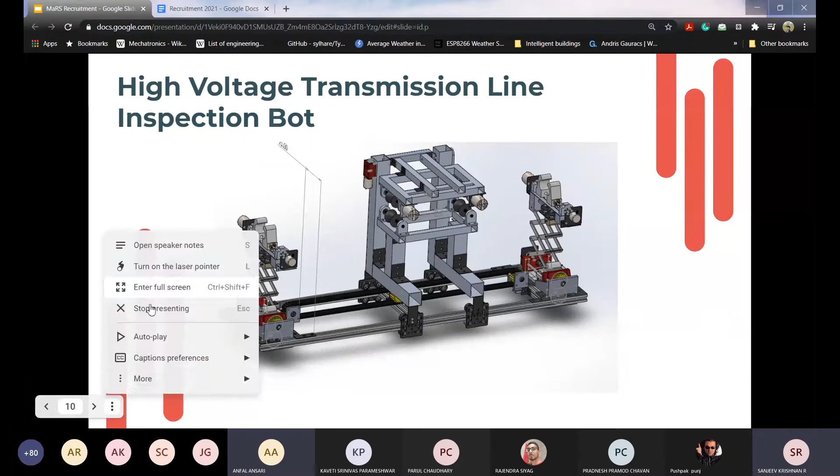High voltage transmission lines need to be inspected from time to time for maintenance purposes. It is necessary as many households and industries are dependent on the power supplied by these lines. As per the current scenario, this maintenance is conducted manually by workers, either by hanging from a helicopter or climbing tall transmission towers and inspecting each and every line. Due to the enormous length of transmission lines, this process is very time consuming and expensive, and there is also a risk to worker life.

Our solution to this problem includes a semi-autonomous bot which enables a worker to remotely detect flaws in transmission lines without any need of physically inspecting them. Our bot can crawl on the wires, detect obstacles and cross them, as well as detect faults in the wires. Next, please.

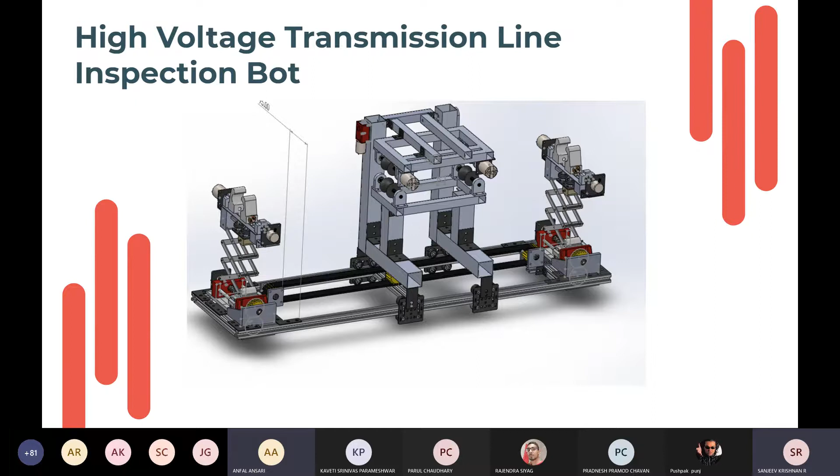Next project is our OT Light. This project basically involves automating surgical lights used in the operation theater. At present, these lights are adjusted manually during the operation. On average, the position of the lights needs to be changed every 7 minutes, thereby hindering the surgical process. There are three parameters that have to be changed: position of the light, its orientation, and its intensity. We are making a bot to automate this process.

By taking feedback from the environment through various sensors, it will change position, orientation, and intensity of light in a way that creates minimum disturbance to the surgeon. At present, we have found a solution using ray tracing and multi-objective optimization, and we are in the implementation phase of it.

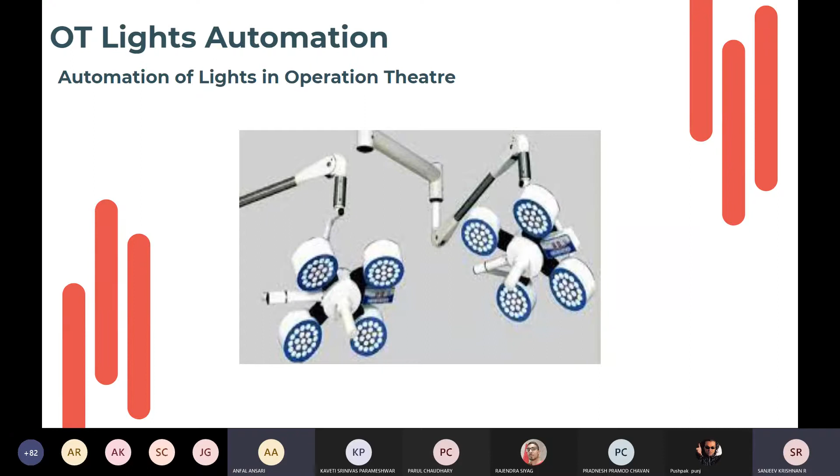One thing I wanted to add here is these two projects, OT Lights and HT Line Inspection Bot, we started after lockdown, during lockdown actually, and all the progress is done in online mode. So you can trust us that we'll definitely be able to teach you and make you do something sensible in this online mode.

Next is Chitrak. Over to you, Shubham. Chitrak was basically aimed to be a dynamically stable, power efficient quadruped bot, basically a 4-leg bot. Each leg has 2 degrees of freedom, and currently we are trying to design 3 degree of freedom legs for the bot. Let's watch that video; it will be clear.

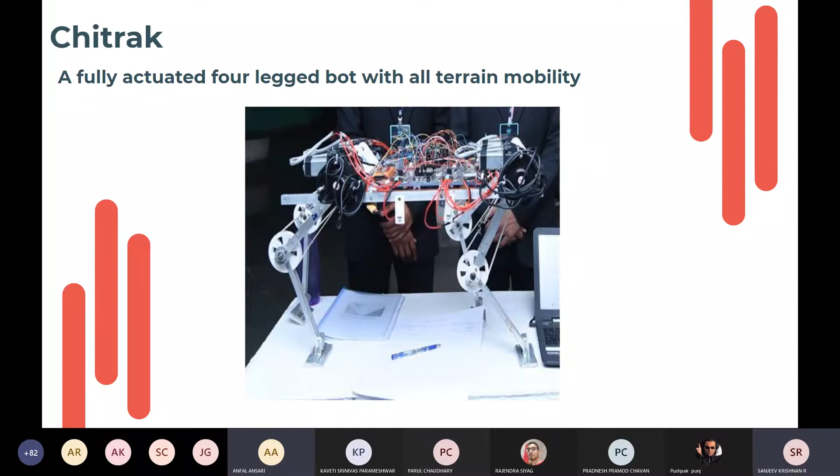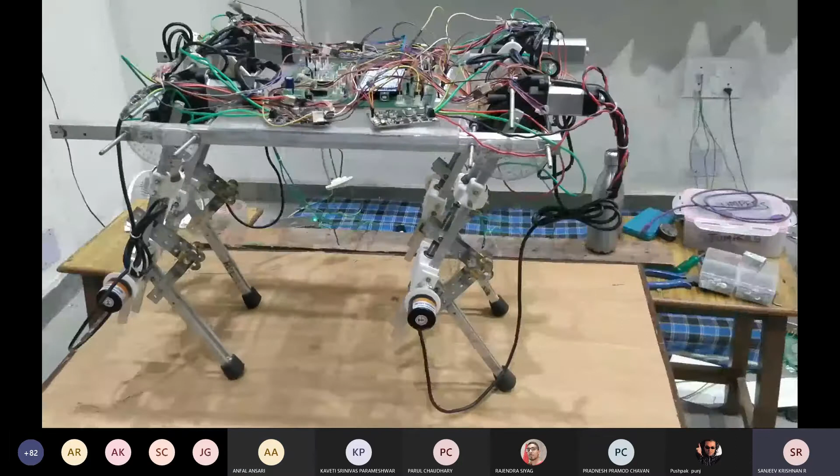Less than half the Earth's landmass is accessible to existing wheeled and tracked vehicles. Our mission is to develop a rough terrain robot that captures the mobility and speed of living creatures. Chitrak robot is aimed to be a dynamically stable quadruped robot with sophisticated computing and power system, advanced actuators and dynamic control. There are many problems with current quadrupeds; one major problem is the runtime of current robots is very less.

While standing, these robots consume energy which can be avoided to increase the runtime. Our aim is to make a quadruped more energy efficient, so we have designed a robot for the same. The 9.4 kg robot will be driven by 4 worm gear DC motors and 4 normal gear DC motors, but with a lead screw mechanism.

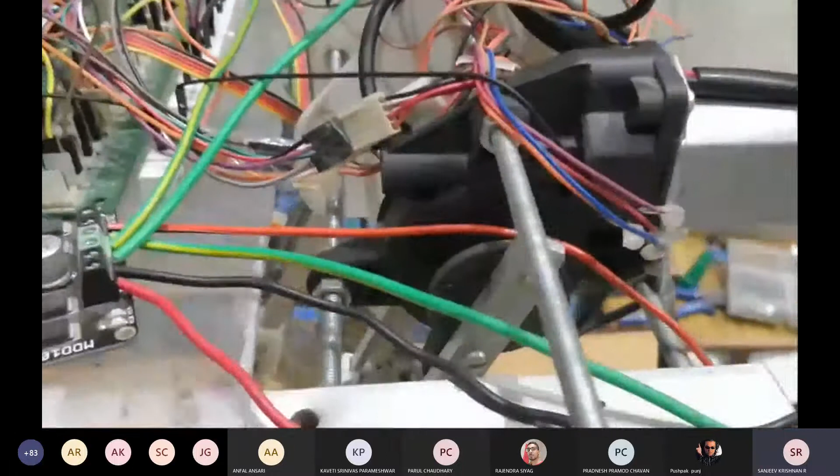Currently, each leg has 2 degrees of freedom, which is aimed to be switched to 3 degrees of freedom soon so that the robot has more flexibility and can easily change its direction. The worm geared motors are placed at the hip joint, driving two links on both sides which are connected to its shaft via coupling.

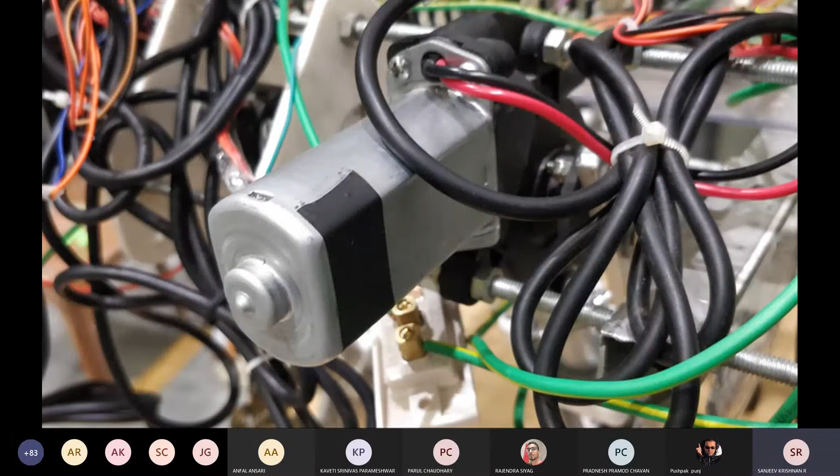The high torque worm geared motor has self-locking capacity which locks the motor in position while providing enough torque without consuming energy. The other DC motor is responsible for the knee joint motion via a lead screw mechanism, which also has self-locking capability, so while standing still the knee joint also gets locked and doesn't consume power. For a single leg, there are two active leg joints. The knee joint is rotated by the actuator mounted at the hip joint through the lead screw mechanism. Each actuator unit has a rotary encoder attached for angle measurement.

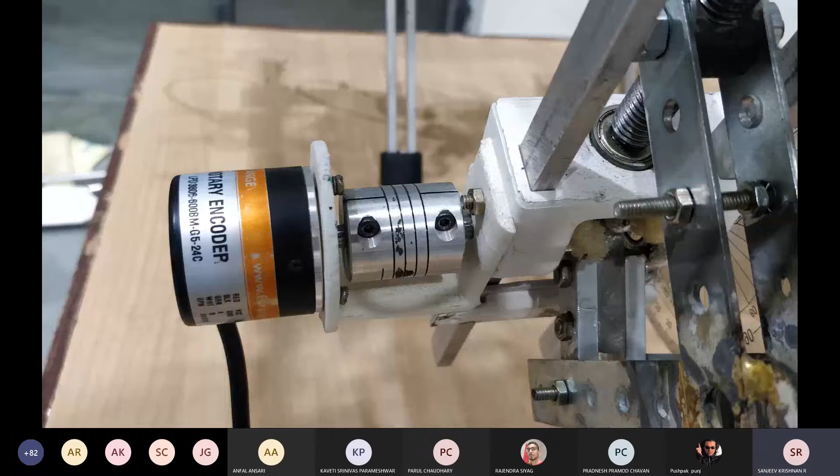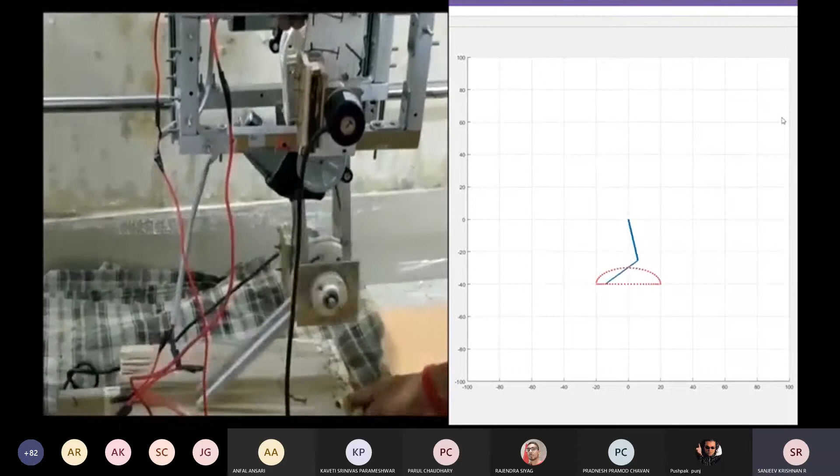In our first prototype of one leg, we simulated the leg motion on MATLAB, taking the trajectory of the end effector to be a semi-ellipse, which approximates the natural leg motion. We applied inverse kinematics on the end effector using an XY reference frame on the hip joint and varied the joint angle accordingly. For smooth motion, we used splines for trajectory planning, taking the acceleration to be zero.

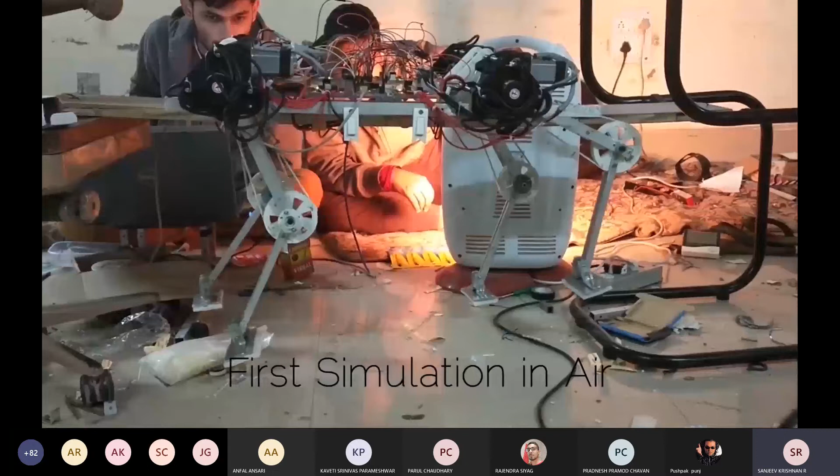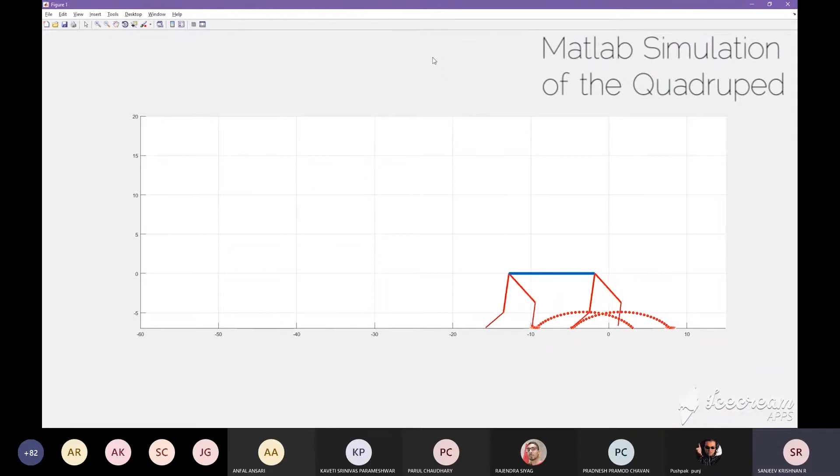We tested two gait cycles. First is the creep cycle, in which every leg moves one by one - when one leg completes its elliptical path, the remaining three complete their straight line. Second is the trot cycle, in which the bot moves forward using two diagonally opposite legs simultaneously. Here is a video of our current design using the trot cycle in air.

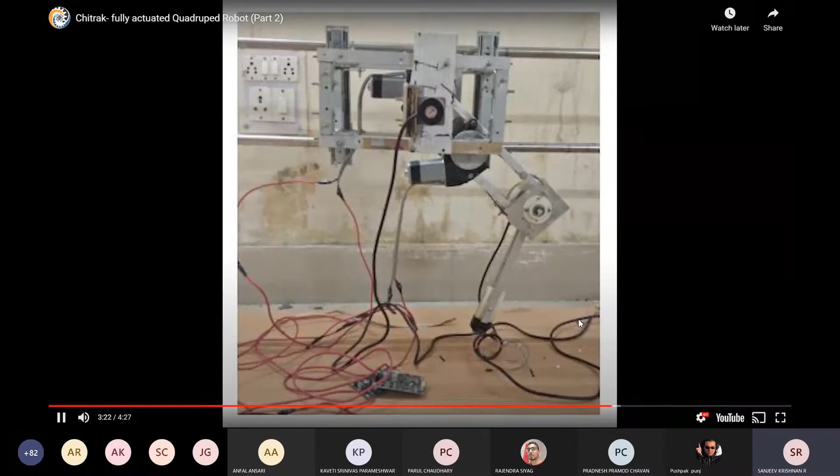But then we tested it on one leg, and we found that the knee joint motor's weight was providing extra torque on the hip motor, so we shifted to a second design, which transfers motion into rotation at the knee joint.

The field of quadruped robotics has huge scope, but sadly in India we are yet to explore this field. Some Western countries have already developed quadrupeds to help their army or for other work. We, Team Chitrak, are dedicated to our goal of building a cheap and energy efficient quadruped robot. We are giving our best to build Chitrak. Thank you.

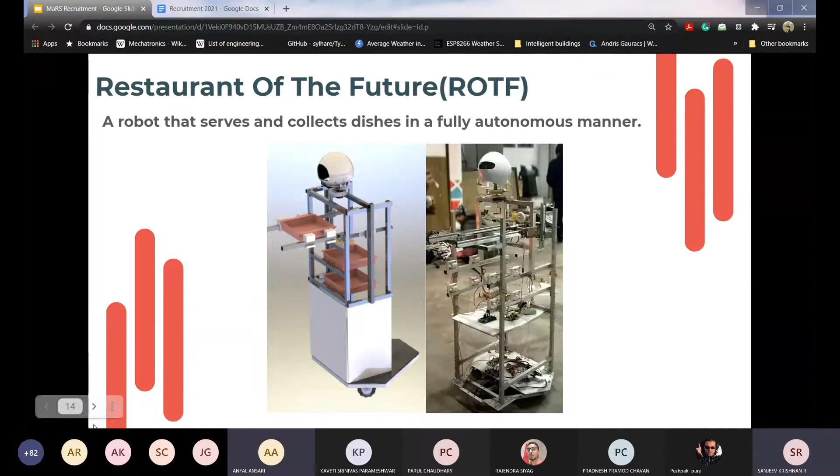Hope you enjoyed that video. Next is our next project, ROTF.

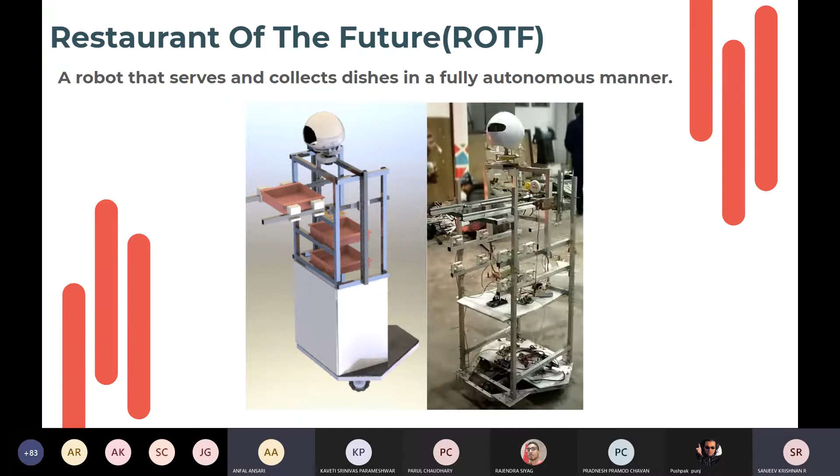ROTF is basically a robot that can replace waiters in a restaurant. It can travel within the restaurant by sensing obstacles and reach out to tables, talk with customers - for which we have made a chatbot. It can pass the order to the kitchen, pick up the order, and deliver it at the table. It is in no way different from human waiters. Let's watch the video of ROTF.

So hope you all enjoyed the videos and the details about the current core team research projects. Now let's get into what we did in Inter-IIT in the past years. Hello everyone, I am Shubham, currently joint secretary at MaRS. Let's discuss some of our achievements.

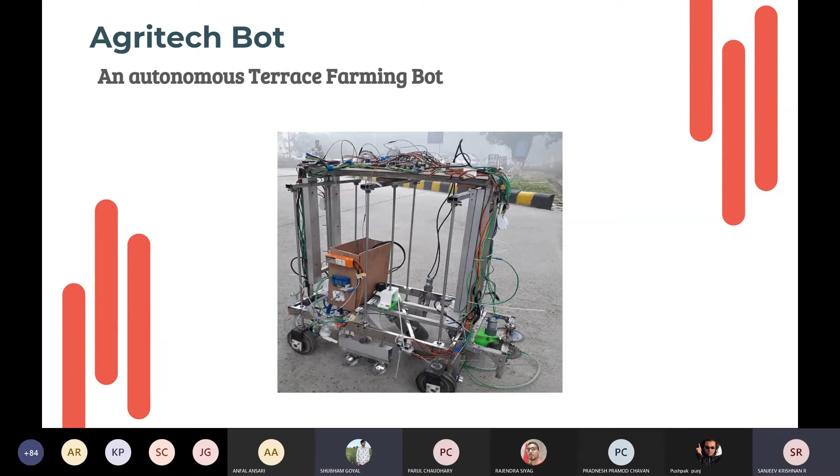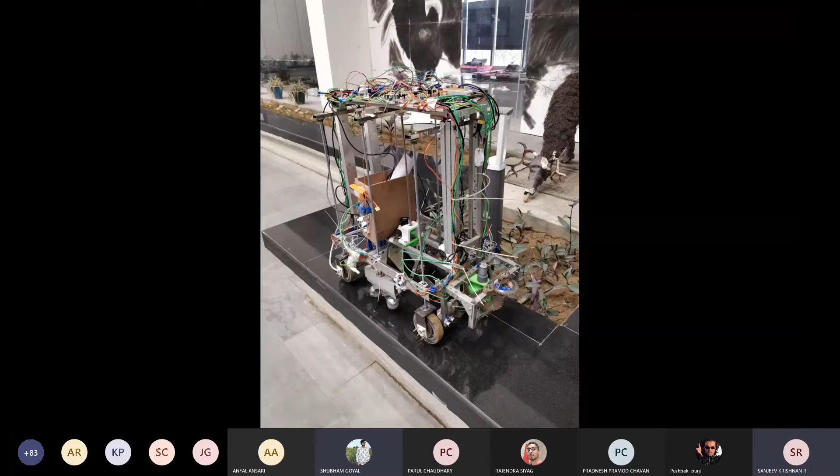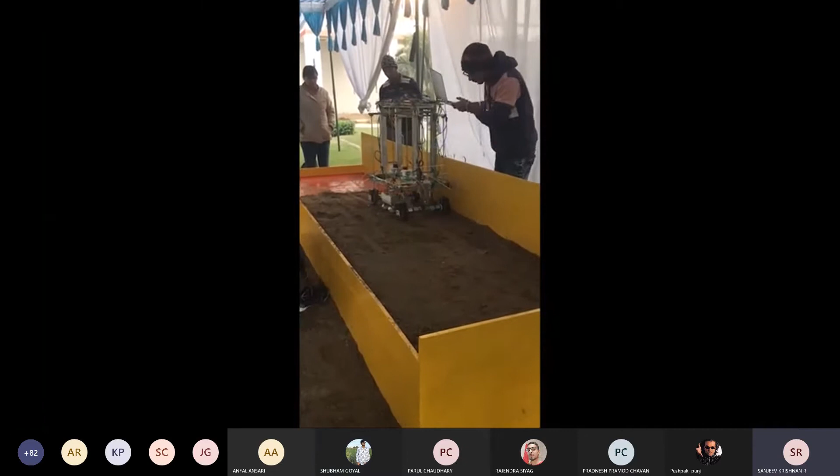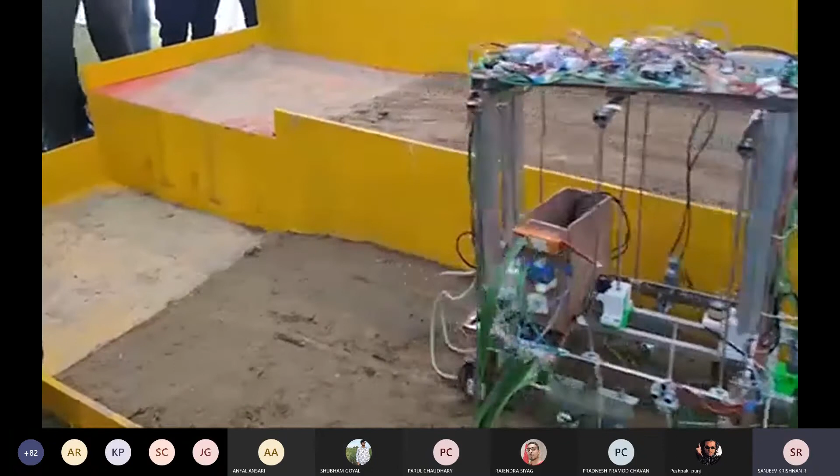Here you can see how it is stepping down the terrace. This is the final video from the event.

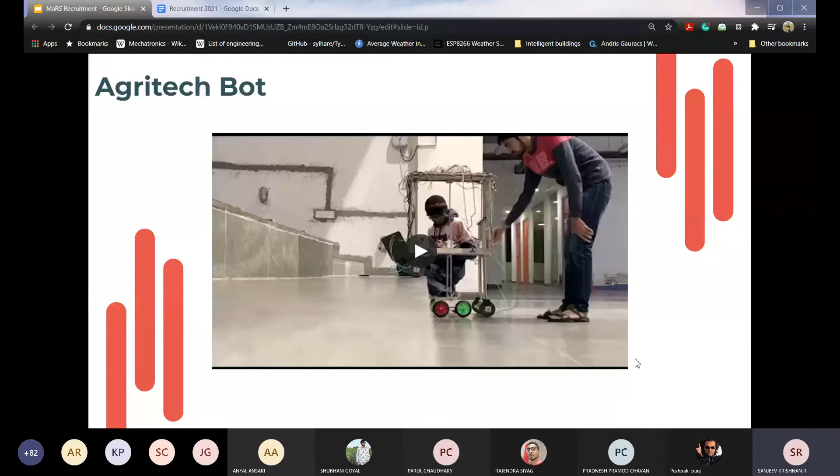This was basically a vision-based obstacle avoidance drone. This was the problem statement in Inter-IIT 2021, which was hosted a few days back - you can see from the mails. Inter-IIT 2021 was online, hosted by IIT Guwahati. In this, we had to clear the walls given in the problem statement - there were three walls given, and we used ROS and Gazebo to simulate the motion of the drone. We participated in this event and didn't get any position, but it was a very good experience.

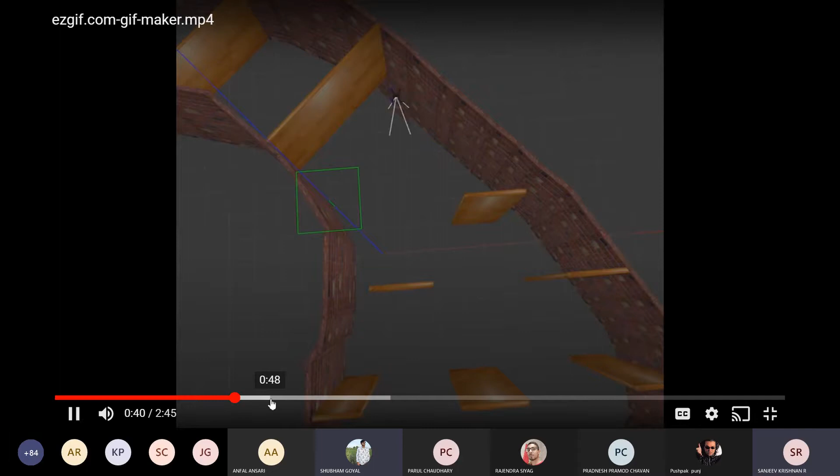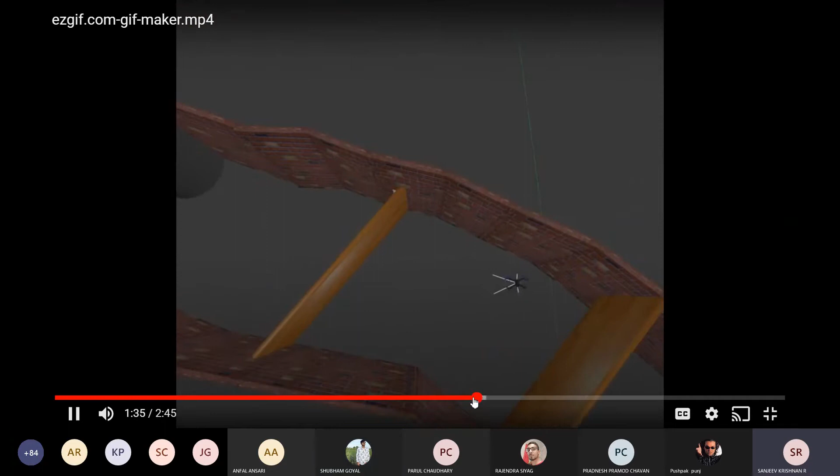You can see it is changing height at present. Now it changes its height again.

At the end, you can see 3 Aruco markers. Our task was to land the drone on the Aruco marker. So now you can see it will land on the Aruco marker. Yeah, done.

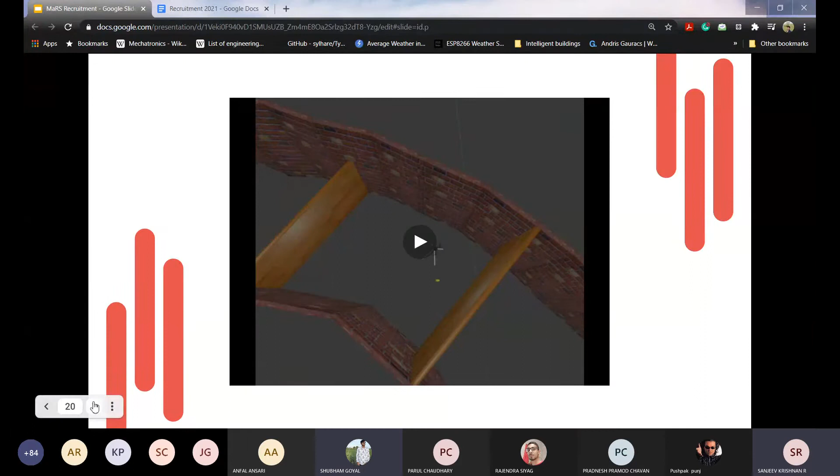Now, our achievements.

Inter IIT Tech Meet 2019. As I told before, the task was to make a fully autonomous terrace farming bot, and our team won the gold medal for this bot.

We also presented an autonomous eyeglass cleaner at the Engineers Conclave. The project was to automate the process of eyeglass cleaning, and we got this project from Lenskart.

IICDC 2019, the India Innovation Challenge Design Contest. In this competition, we presented the ROTF board, and we are currently in the semi-finals of this event.